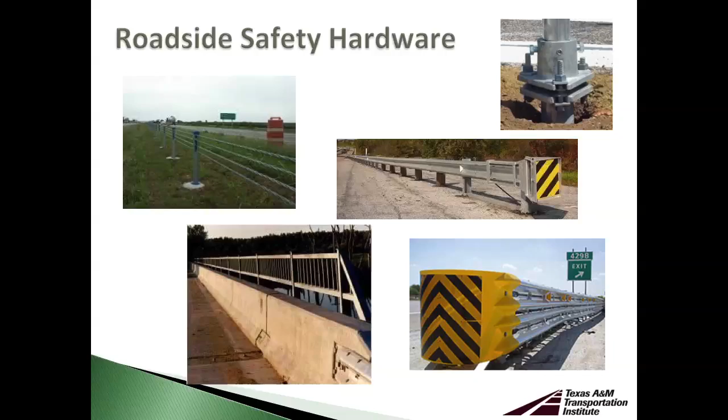So basically, what we need to do is develop devices that shield hazards and contain errant vehicles in general. They need to redirect the vehicles. At the same time, though, they need to be safe for whoever is in the vehicle, or whoever—I should say it could even be a rider.

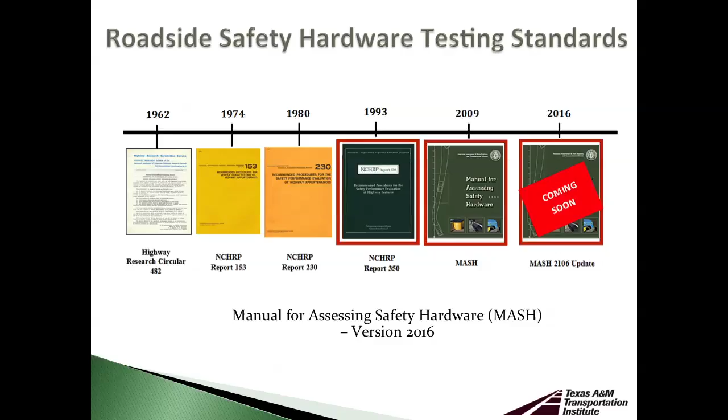We're lucky that since the 1960s we have had standards that we follow in order to test these devices. You can see here the history of the testing standards that we have. Actually, the very latest one is literally coming out in days—it's more an update of what we had in 2009.

Now, the big thing is that we have a very good testing program. We know for passenger cars, pickup trucks, and heavy vehicles of different types what conditions we need to test these devices under. So if we have to hit a guardrail with a car, we know it's going to be at 25 degrees, and it could be 44 miles per hour or 62 miles per hour depending on whether it's a low or high speed road.

The problem is that there is nothing, unfortunately, for the motorcycle community. There is nothing in these standards that talks about how we should evaluate motorcycle impacts against roadside safety devices.

So what about motorcycles? Unfortunately, there are very few things I'd like to touch on right now, because there is very limited research to address rider safety when impacting roadside safety hardware. This morning and later on we'll talk about problems with speed or alcohol or education for riders. But this gets personal because that's my area - when you develop a guardrail or any type of device you place on the road, you really want to make sure it's safe in case it's impacted by a motorcycle, and especially by the motorcycle rider.

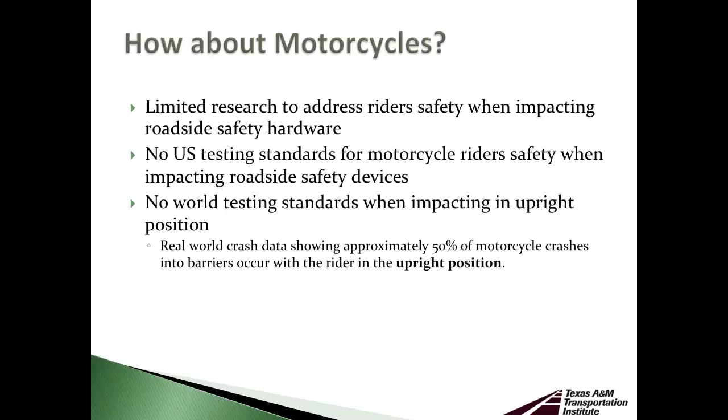I'd like to touch on a couple other things. In the US, there are no existing standards for motorcycle rider safety when they impact roadside safety devices. Worldwide, there are no standards to evaluate motorcycle impacts against roadside safety barriers when impacting in an upright position. There are some attempts and specifications developed, especially in Europe and Australia, to evaluate how to possibly test motorcycle riders when sliding, but nothing in terms of upright position.

And it's kind of upsetting, because there are studies - especially in Europe, not in the US, or at least that I'm aware of - that have shown roughly 50% of the impacts of motorcyclists against roadside safety barriers occur in an upright position.

So the question would be, do we need standards for motorcyclists or to test motorcycle impacts? I'm not going to talk too much about these numbers, since you've seen a lot of numbers this morning that might be even more accurate than what I'm showing you. We all know, and that's the purpose of this graph, that we still need to do a lot about motorcyclist safety. This is the trend for motorcycle fatalities, and it's basically constant throughout the past decades.

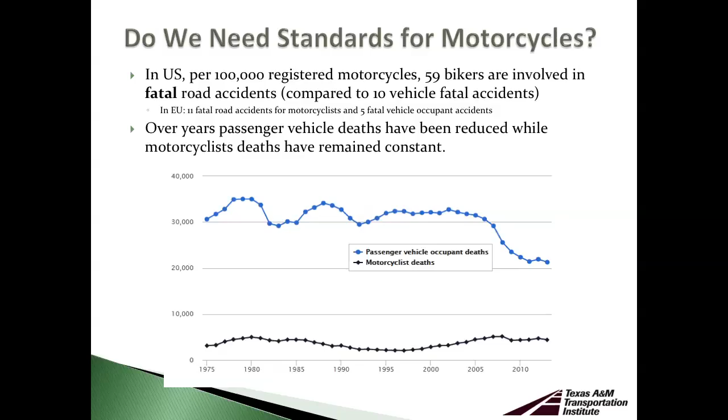And here you see the tendency of passenger vehicle occupant deaths slightly going down. So there's a lot of proactiveness to work on safety for other types of vehicle fleets. But from my research area perspective, not much has been done, although there were some attempts.

There were some attempts, like these standards and specifications I'm showing you right now. This was all developed in Europe, so I don't want to go too much in detail - it's very technical, but I'd like to briefly touch on some of them. I'm not going to call it a standard - this was actually more a procedure developed back in 1998 in France. What they wanted to develop was a procedure, not a standard, meaning the country isn't mandatory to test these devices according to this procedure. It's up to whoever developed it, whatever wants to be tested.

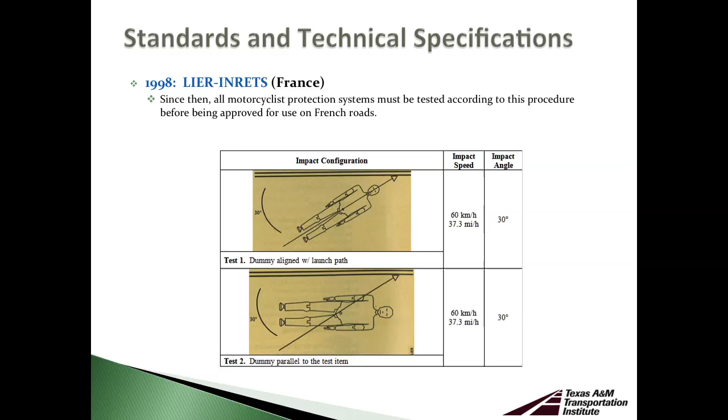This procedure specifically looks at the situation where the motorcycle slides, so the rider leaves the motorcycle and keeps sliding, then impacts whatever type of roadside safety hardware - could be a guardrail, a concrete barrier, anything else you want to evaluate. So it's no upright situation, just sliding. This used a dummy, and at the time in 1998 when they developed it, they chose a 30-degree angle and about 37 mile per hour impact. Now, very briefly, let me keep going on the history.

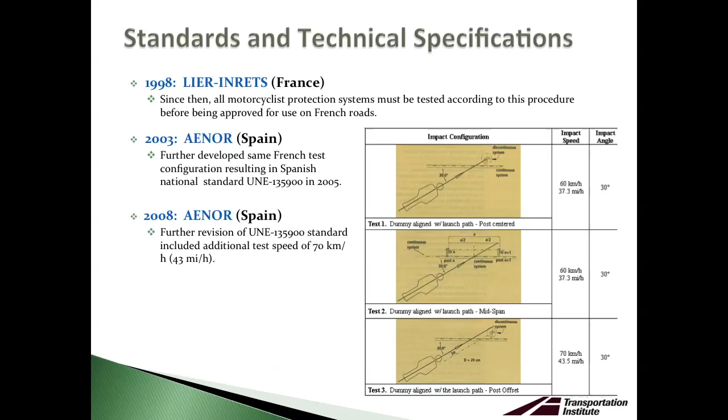This procedure was actually taken from France to Spain, and they retouched it a little bit, further developing it as their national standard, just in Spain. Then in 2008, they revised it once more and added 43 miles per hour testing. Again, the idea was more or less the same—a sliding configuration, not upright—but they just added this test.

In 2011, the European Union started getting very interested in this topic. So what they did was add a part to their standard, but not as a standard—as a technical specification. They wanted to start testing roadside safety devices by considering impact with motorcycle riders, once again not in upright position, but sliding.

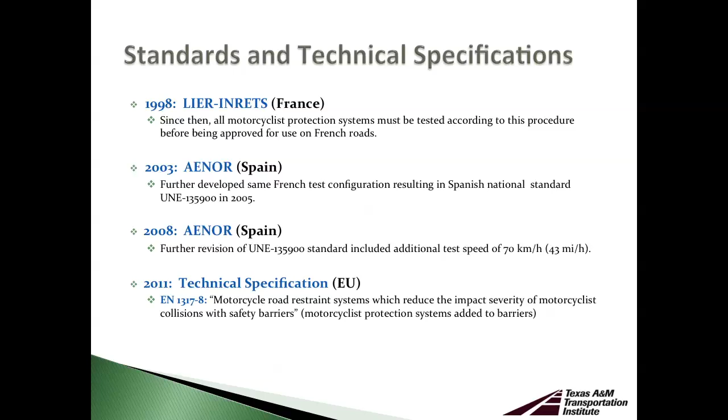The nice thing about this technical specification, even if it's not a standard, is that it's great some communities are proactive on this. Developing this procedure isn't as easy as one might think—you have to think about what conditions you want to test, how to assess the validity of the test, and how to determine if it passes.

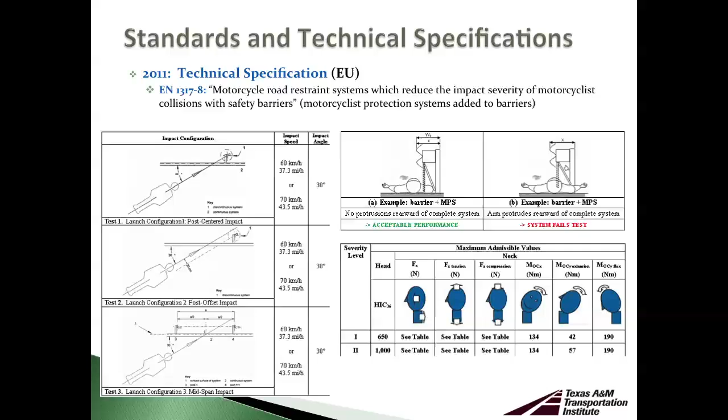They also added a quantitative evaluation, using what's easiest to call a dummy—technically an ATD, anthropomorphic testing device. This ATD is instrumented in different parts of the body, and by collecting data like accelerations, we can calculate forces and moments. Then, using biomechanics, we can say, for example, if the HIC value for the head cannot exceed 1,000, going over that means the test is a no-pass, since it would indicate an incapacitating or severe injury, even death. That was the nice part I wanted to highlight and give credit for, since a lot of thought went into it.

However, there are some constraints and problems. As I mentioned, it's not a standard, just a technical specification. A comment came from the UK, from TRL at the time—I'm not sure if TRL still exists—but they made clear the UK was not going to test according to this procedure since it's not a standard. So, they're not obliged to, and the cost involved, especially with an instrumented dummy, can be quite high, which is understandable. The question then becomes: can we find another way so research and improvements don't stop just because of costs? I'll get to that in a moment.

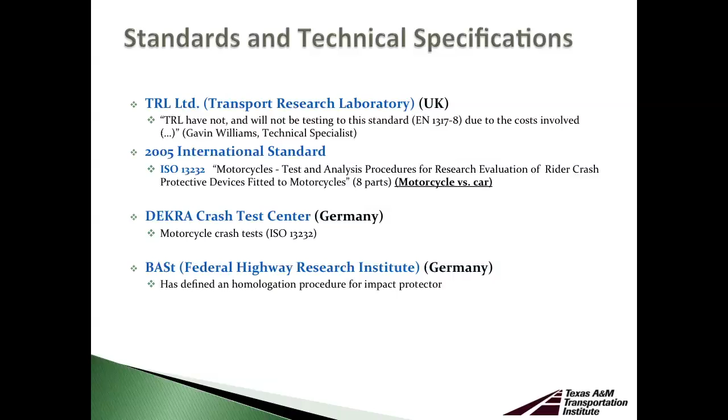Switching topics a bit but staying in standards—have you heard of ISO 13232? It's an international standard that deals with how to test and evaluate the impacts of motorcycles against cars, or against vehicles in general.

But it's not the same thing having an impact against a car versus against a roadside safety device. Think about a roadside safety device—a post, a combination rail, or just a guardrail—there's a lot of interaction if a rider impacts it. With a car, the behavior is different. I'm not saying it's less severe, just that it's a different situation.

So although there's an international standard, and I think we can take a lot from it to develop a standard for roadside safety devices, it's still not the same thing, and we cannot just take it and apply it directly.

The good news is that although we don't have standards—just a technical specification in the EU—some countries, particularly Germany together with Australia, have been very proactive. They've developed different crash procedures, including situations where they crashed motorcycles in upright position. They've been well ahead in the community.

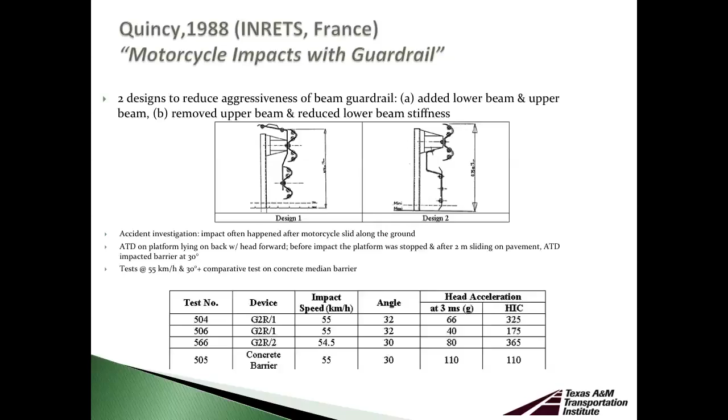Keep in mind, all the changes or considerations made to the designs ultimately still need to be tested according to the testing programs for vehicles that exist in Europe too. So you can modify whatever you want, but then you have to go back and test it with the vehicle to make sure it behaves as it should. It's not so easy—you have to consider different things.

These were just a few other data points I wanted to include. I don't know that we need to go into much detail, but I wanted to show you, with this paper or study, that guardrails themselves can be a little tricky. There can be a lot of improvements, or at least things that can be investigated, to see if we can do something to improve the behavior.

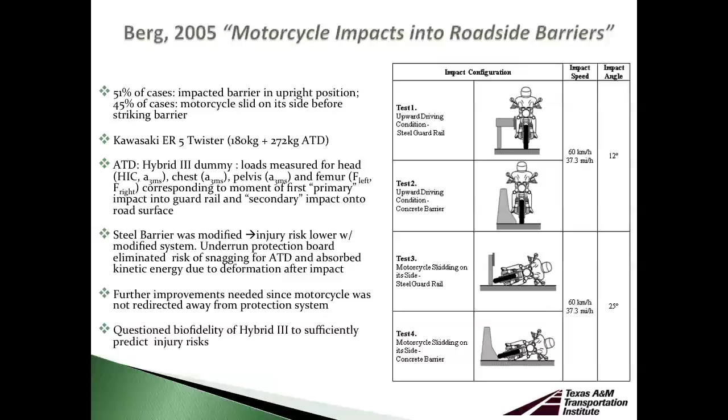In 2005, a study was done between Australia and Germany. There were some full-scale crash tests developed with upright motorcycles and also with inclined, or sliding, motorcycles. They used different types of barriers, looking at post and beam guardrails versus concrete barriers, because the behavior is going to be different. I'm not saying impacting the guardrail will necessarily be worse, just that the impact is different, and there are different things we have to consider, although with a guardrail having the post, one might think we already have some issues there.

I thought it was interesting to bring up this study, first to show the proactiveness, but also to show that they actually used dummies, and in this case, upright motorcycles, to evaluate the possible rider injuries.

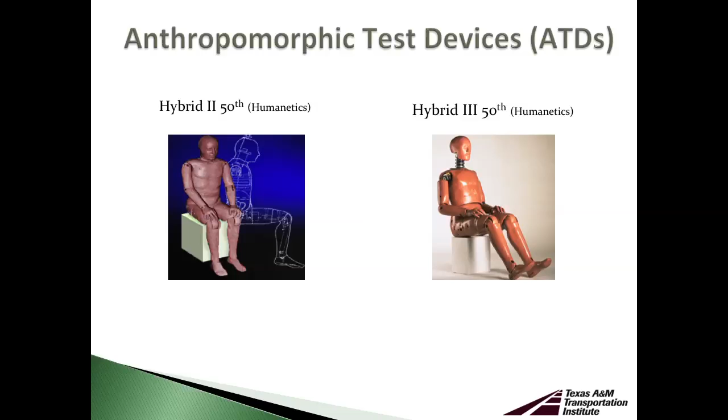Normally in roadside safety, when we use dummies, it's a little more complicated, because we actually don't use instrumented dummies - we have other ways to evaluate occupant risk, not because we're not looking at that, we just have another way to do it. But in this case, talking about a rider, there is no other way - you have to use a dummy, because you need the real interaction between the rider and the barrier. You cannot do it through some acceleration measurement of the motorcycle - that has nothing to do with what happened to the rider.

So what they did was use what we call the Hybrid 3, which I'll briefly show you in a couple of images later on. That's great - that's what we have available. It's relatively cheap; fully instrumented it costs around $200,000.

But the problem was they realized these dummies were validated for frontal impacts - they were not validated for 15, 20, or 30 degree impacts. They were validated for frontal or very few impact angles. So that was the other question mark: what are we going to do? Are we still going to use these dummies, or are we going to look into developing others? And it can be a little tricky even there.

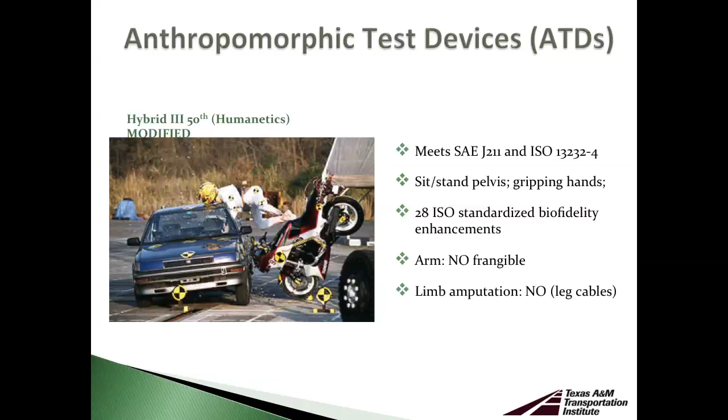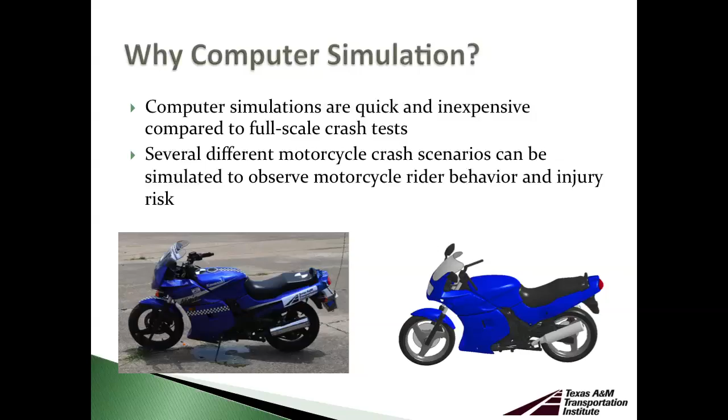Why computer simulations? This is what I wanted to talk about - what we have internally funded at TTI over the last year and a half. Testing with motorcycles is very expensive - we have done it, and I'll show you a slide on that very briefly later. But it's very expensive, especially when you start considering an instrumented dummy on top. So another efficient way, which we are very familiar with and use all the time in our roadside safety device testing with vehicles, is using computer models.

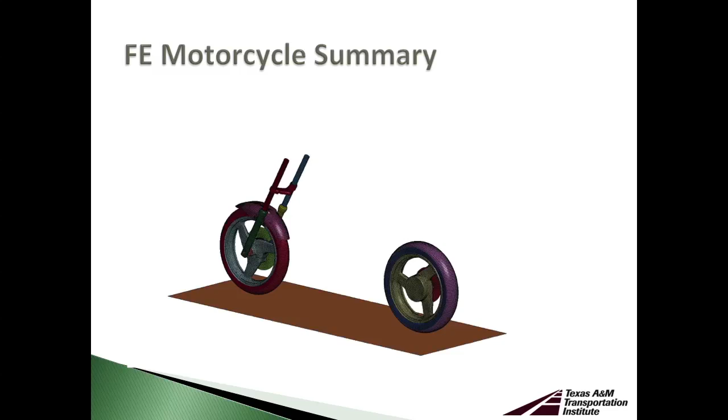So what we did was develop a computer model. Let me show you - I think this is a little interesting, so I'll show you while I talk. We took a motorcycle - it's a long story why we chose that one specifically, tied to a project that's confidential, so I cannot talk too much about that. But we dismantled the motorcycle piece by piece.

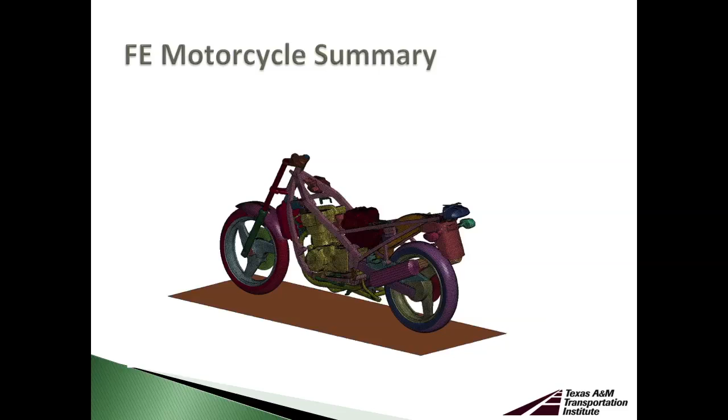We scanned it, and then we developed for each little part, and in connection, we developed a model. We developed a surface, a mesh, and ultimately we had our full model, which there it is right there.

We also are including these latest efforts that we're trying to complete in the next few months. We are adding the ATD, the dummy that we were talking about. It's not going to be geared, but at least it has the helmet. That's a good thing, we have used that. We use the motorcycle model.

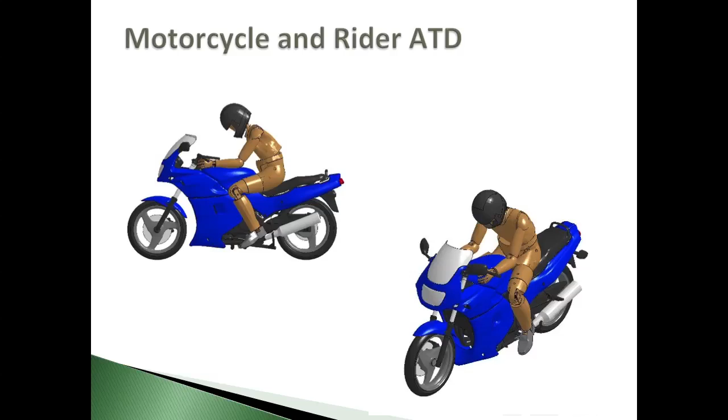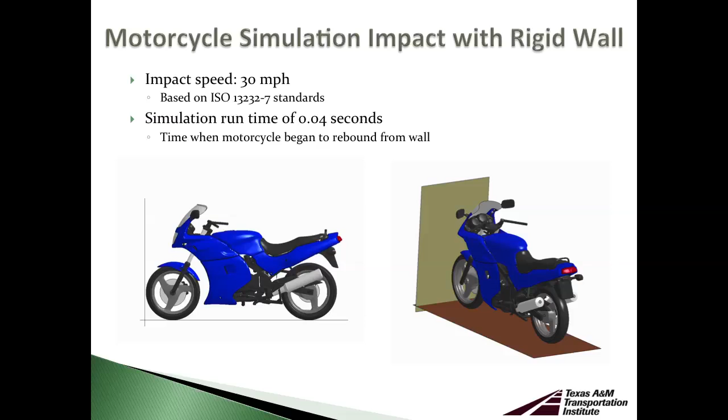To evaluate a specific interaction with a barrier, we got to the point where we had to develop a testing program, not standard, but a testing program, and we basically started from zero. So we had to find out what speed, why that angle specifically, what type of motorcycle even to choose. That's another thing - what motorcycle are you using? There are different types of motorcycles, and the behavior of the rider can be different.

And so the nice thing about this is that what we do, we use a tow cable system. So the motorcycle is completely free. Well, it's first attached to a cable, and the cable pulls the motorcycle at the maximum speed that it should go, whatever speed was there - I think it was 45 miles per hour.

And right before impacting the barrier, we release - see on the bottom, there is this part here, and even the wheels, they completely release. So the motorcycle is free, in upright position, to impact the barrier like if it was in real life. So there is no interaction or nothing with any system that we have with the dummy on top. And we saw some interesting stuff - that's why later, in the past year and a half, we decided to develop the computer model of the motorcycle.

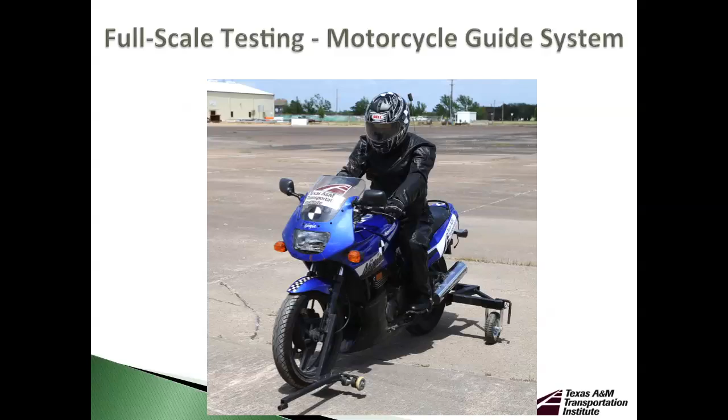So I just would like to conclude my presentation by showing you a couple of examples. I don't want to put across anything, but if you look around when you drive - maybe not when you drive, but when you are like a passenger - if you look around and you see all the roadside safety devices around, try to imagine what would happen if a motorcycle rider impacts them.

You can have a situation like these - they're really not combination rail, but let's call them like this, combination rail, when on the bottom you have a certain type of rail, and on the top you have another one. In this case, actually, it's not very hard to do something to improve the behavior of the system so that it doesn't hurt the rider, because this is very simple - they just have some posts, and there is the fence, the net.

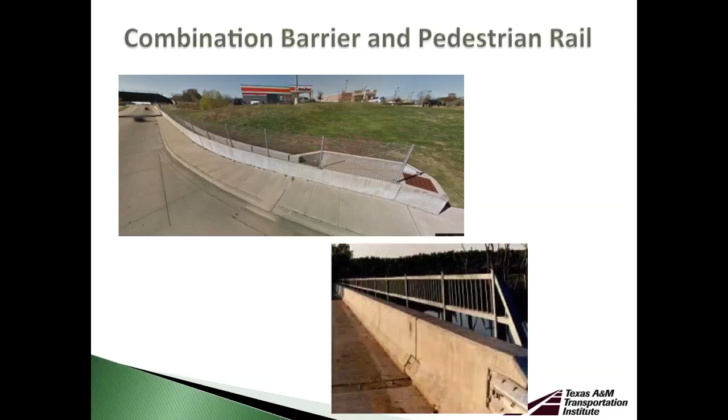So you can kind of go and develop some breakaway devices on the bottom or shield. The problem comes when you have a real combination barrier, and the top - like in this case, again, this is just an example - needs to be compliant with MASH or AASHTO code, and you have specific design loads that you need to meet. These things are extremely hard to break, even with a vehicle - imagine if you want to break them with an arm or with a person.

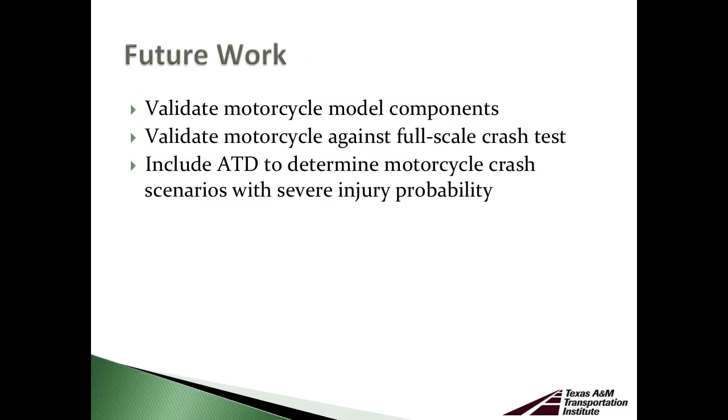So that's more or less where we're standing right now. We are in the process of developing some testing, possibly, or to validate anyhow the model that we're doing - the motorcycle model - and including finally our ATD to evaluate the injuries and the severity of crashes.